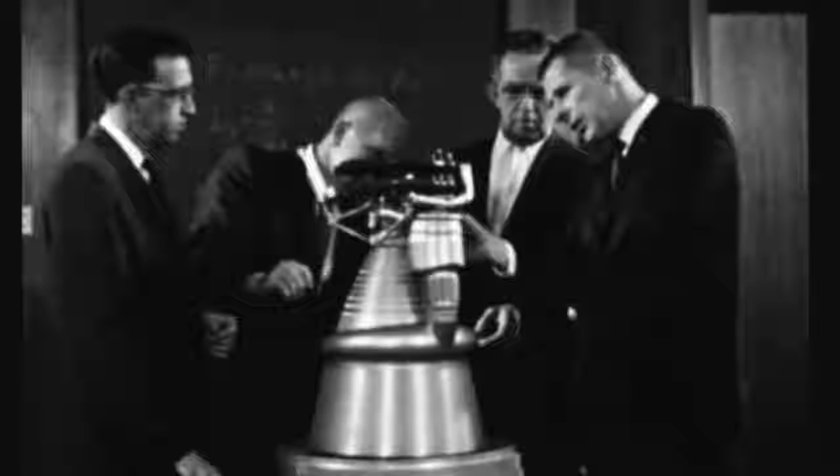Shortly after its establishment in 1958, NASA, the National Aeronautics and Space Administration, began the job of creating rocket power capable of thrusting skyward a spaceship weighing 3,000 tons. How much is 3,000 tons? As much as this nuclear submarine, or 24 jet airliners fully loaded with passengers, cargo, and crews.

But such gargantuan power must also be as humanly reliable as possible, for men will ride the ship to the moon.

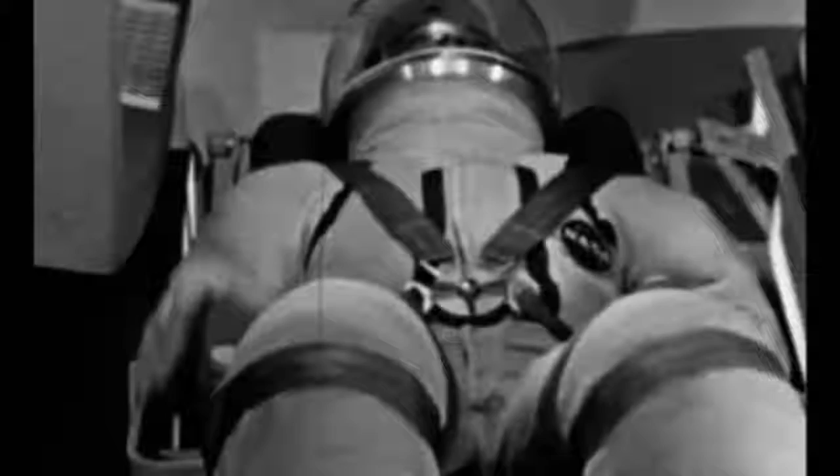Under the technical direction of the Marshall Space Flight Center, the task was assigned to Rocketdyne, a division of North American Aviation Incorporated.

In California's Santa Susana Mountains, where Butterfield stages once rolled down rugged trails, Rocketdyne engineers had created America's largest propulsion field laboratory. On the ashes of campfires built here by the outlaw Joaquin Murrieta, other rocket engines had already begun their trials by fire. Anchored to test stands, engines poured forth their pillars of flame.

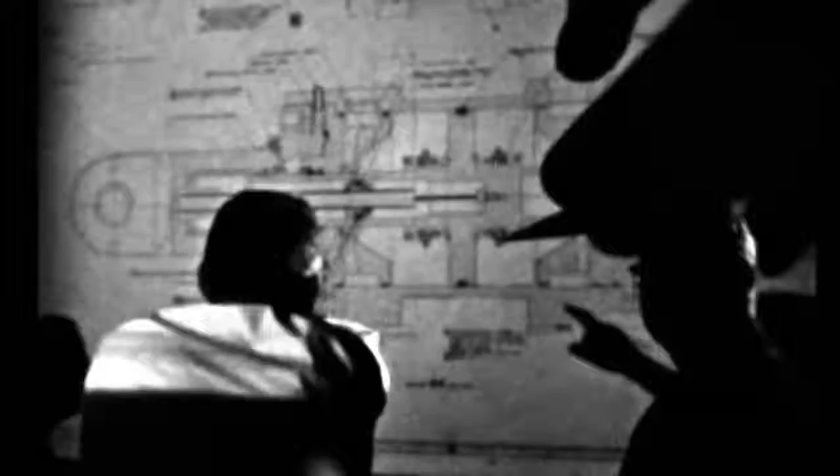Work on the giant engine, christened the F-1, began with studies of other Rocketdyne accomplishments in rocket power. From investigations made for the Air Force as far back as 1955 to space shots of the 60s, experts examined and evaluated results. Information from 20,000 engine and component tests was thoroughly reviewed, analyzed, checked.

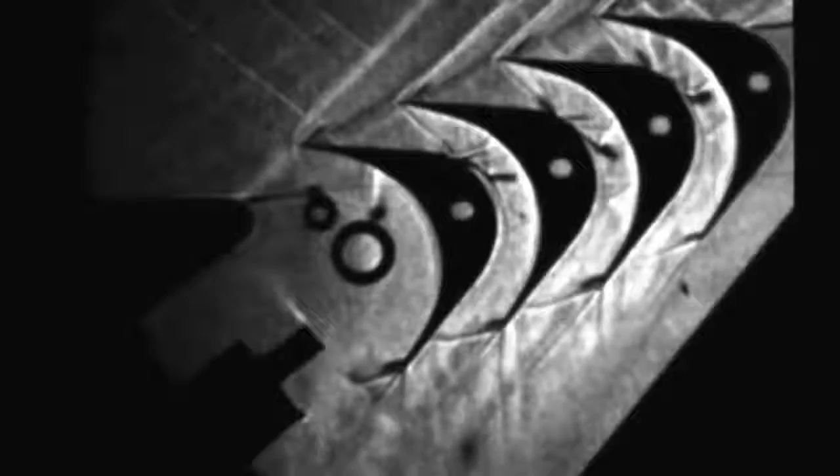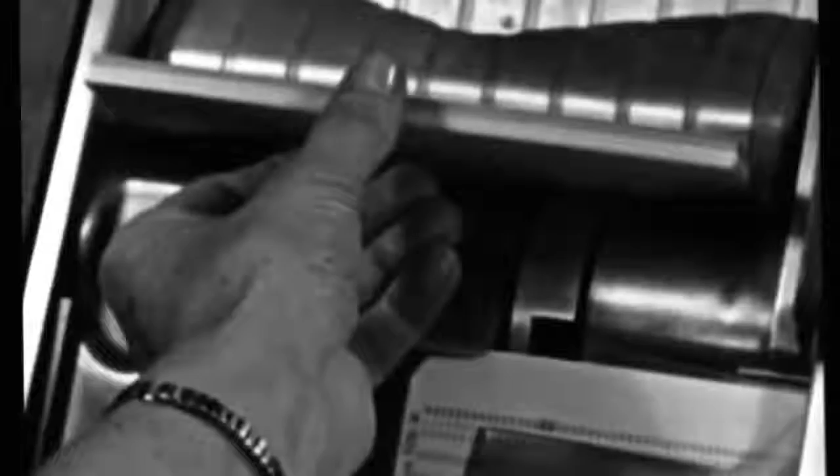To the F-1, the Marshall Space Flight Center had assigned the mammoth task of lifting the mightiest rocket ship ever from launch pad into space. For this reason, NASA had placed the highest priority on the project.

To achieve the tremendous push or thrust needed for this immense engine, data and design were precisely plotted. Steadily, systematically, design developed into a prototype.

Harnessed here within the metal and might of this engine lay the outer space prestige of the United States. This new F-1 must perform perfectly, for more than just time and money are involved. Men's lives will depend on it.

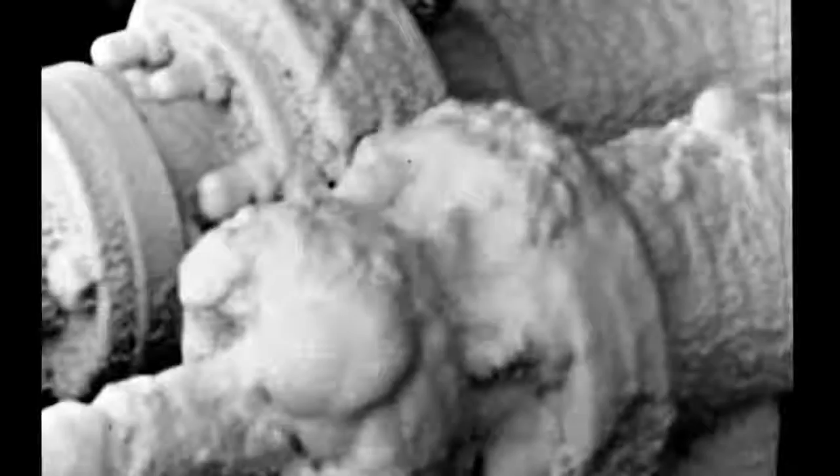Since there is no air in outer space for a rocket engine to breathe, it must carry along its own. Liquid oxygen at 300 degrees below zero. At the same instant this frigid oxygen is flowing, however, an inferno of 5,000 degrees Fahrenheit is created inside the engine.

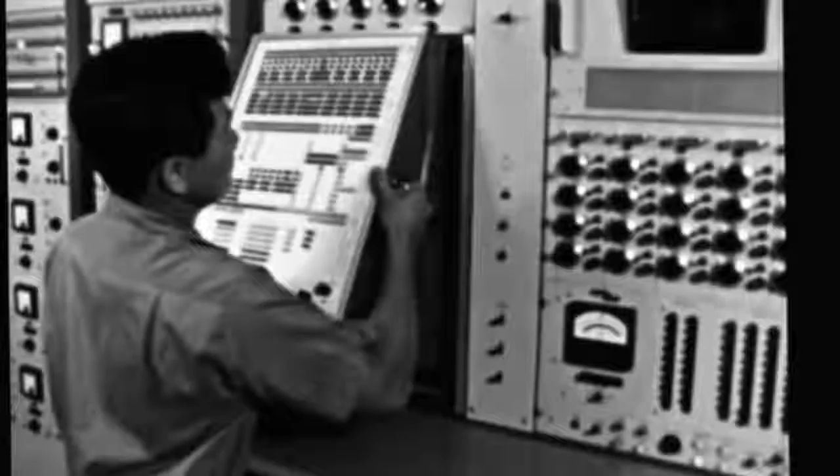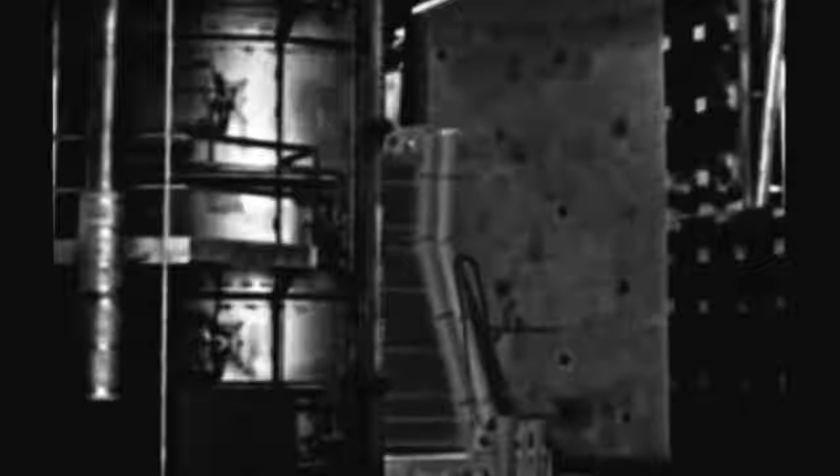A new generation of production techniques and tools had to be devised. New methods of manufacture, new adjustments, new ideas. Advanced metallurgy had to produce superior metals of great strength. The latest instruments and inventions were prepared and put to their purposes.

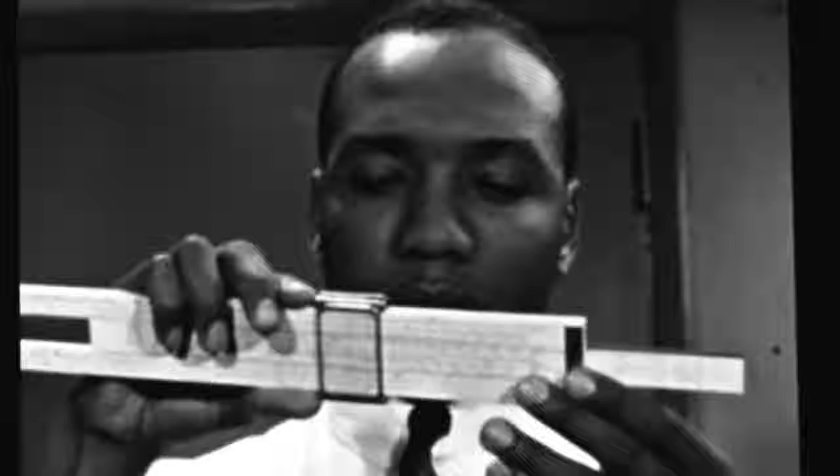Essential details were pictured in black and white. A myriad of matters were pinned down. The best talent and technologies were assembled.

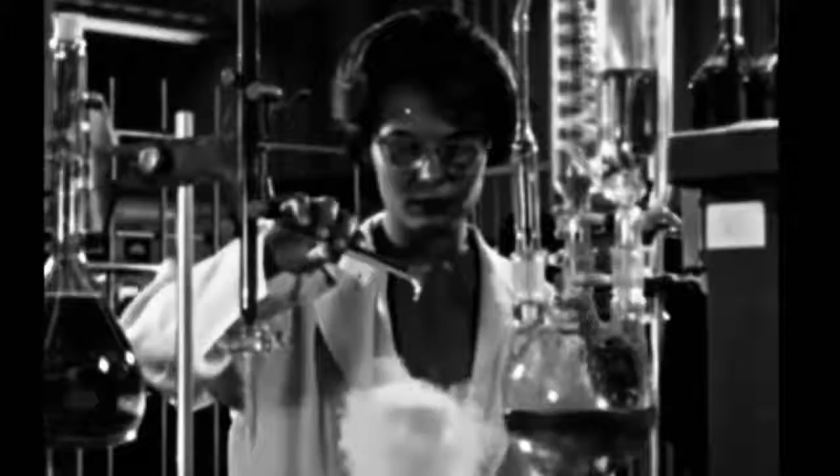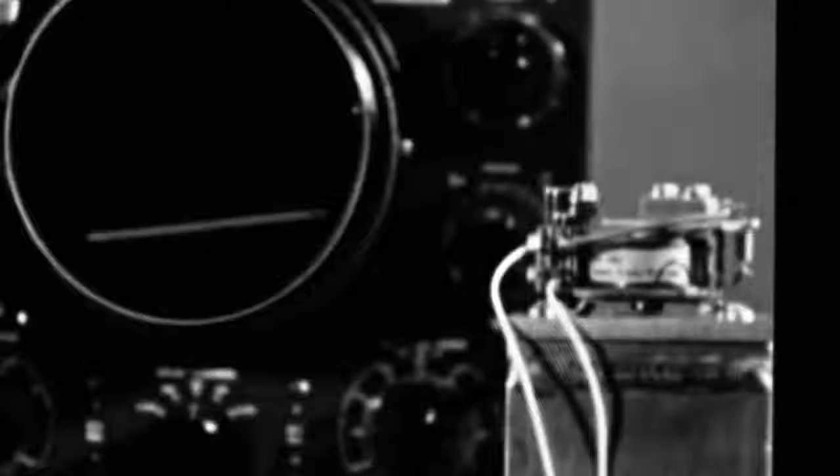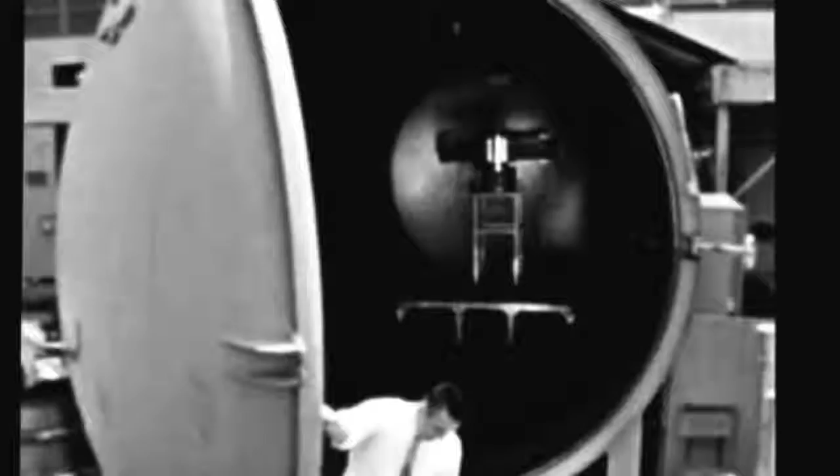Tests were run for withstanding the tremendous acceleration of launch. Intense vibration, prodigious pressures, the vacuum of outer space, extremes of cold and heat.

Yet all of these were merely samplings of the countless complexities to be solved. There was more, much more to fathom.

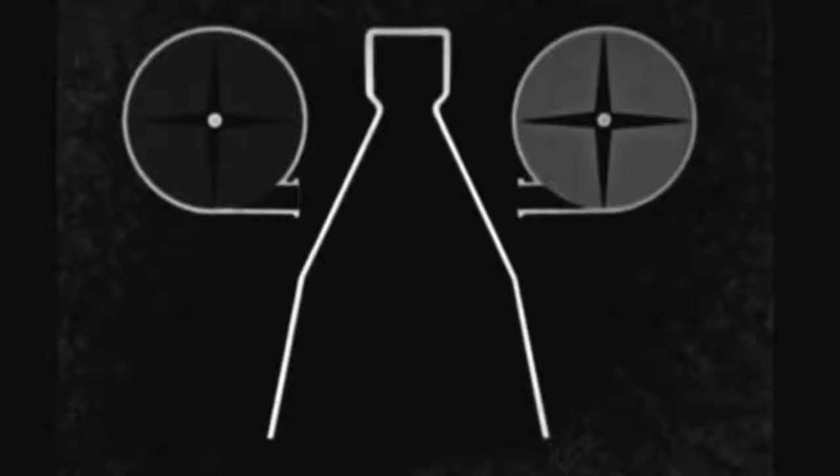To feed the F-1 with liquid oxygen and kerosene, pumps were needed, capable of forcing 3 tons of propellant into the engine in a single second. That's as much fuel as your automobile uses in an entire year. The combined power of these pumps would equal 30 diesel locomotives working together.

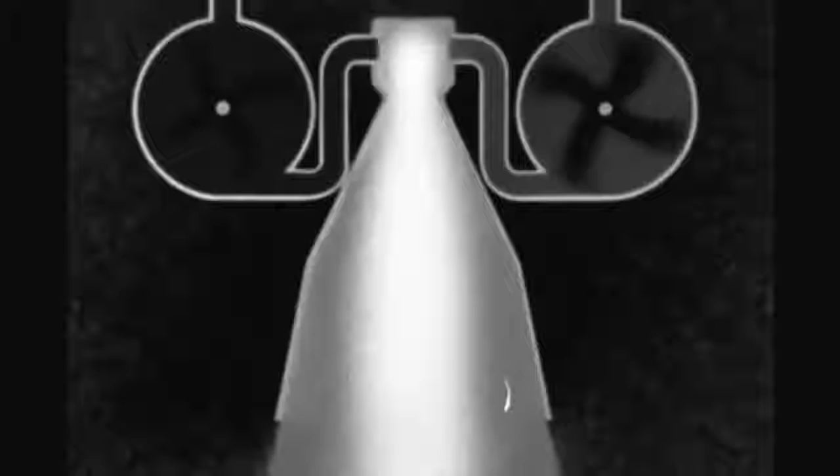There was more for the engineers to ponder. Because weight in a rocket is at a premium, each pump must be confined to a small, compact package.

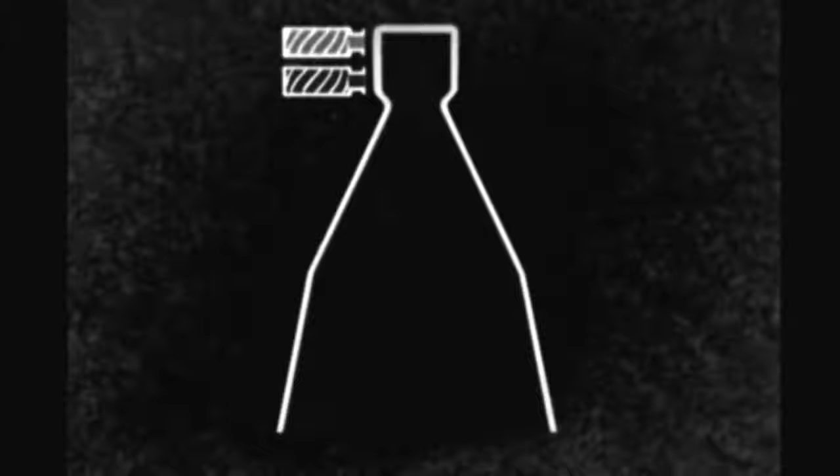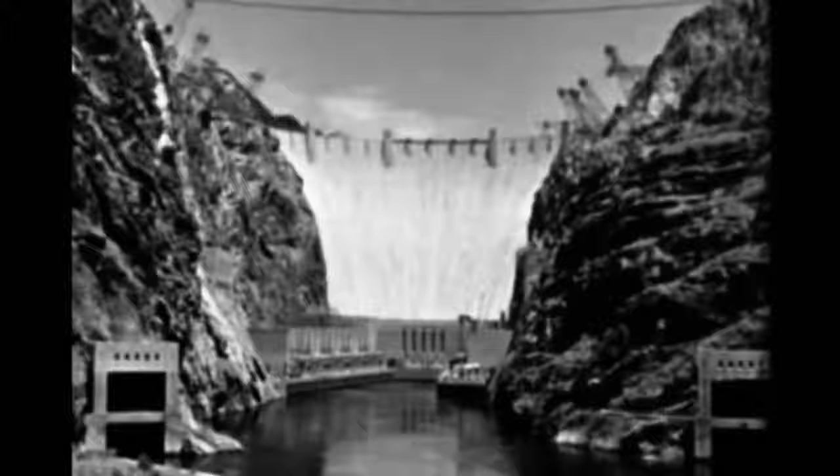Entering the combustion chamber, fuel would have to burn with volcanic force to produce a thrust of 1,500,000 pounds. The equivalent power generated by 17 Hoover dams.

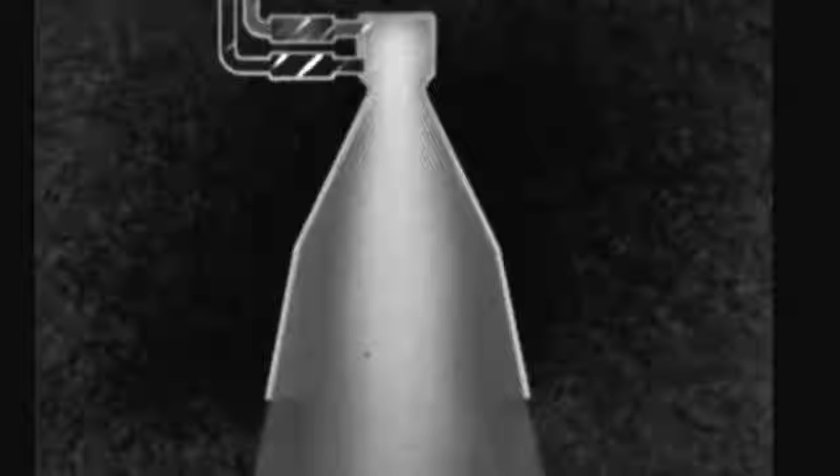Once unleashed, however, this titanic force must still be under absolute control. Thrust precisely delivered. Duration regulated to the fraction of a second. The engine must be instantly stopped when necessary by the push of a single button.

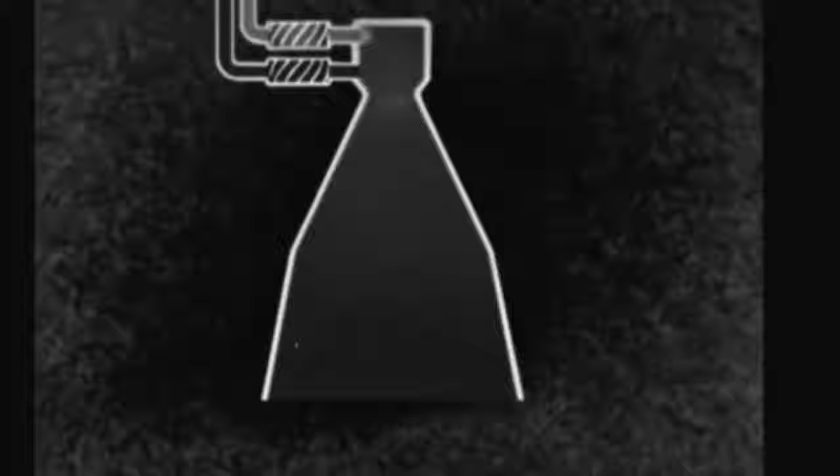To these formidable demands, the Marshall Space Flight Center had added the requisites of reliability, simplicity, and ruggedness to provide the utmost safety for the men who will ride atop the F-1 engines.

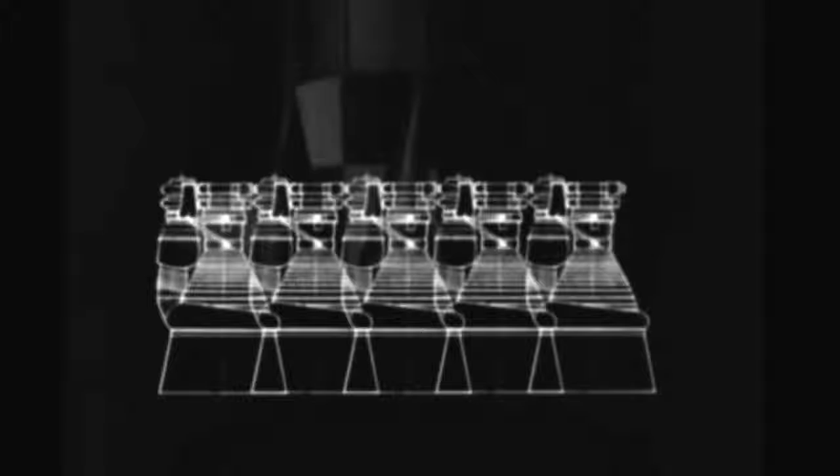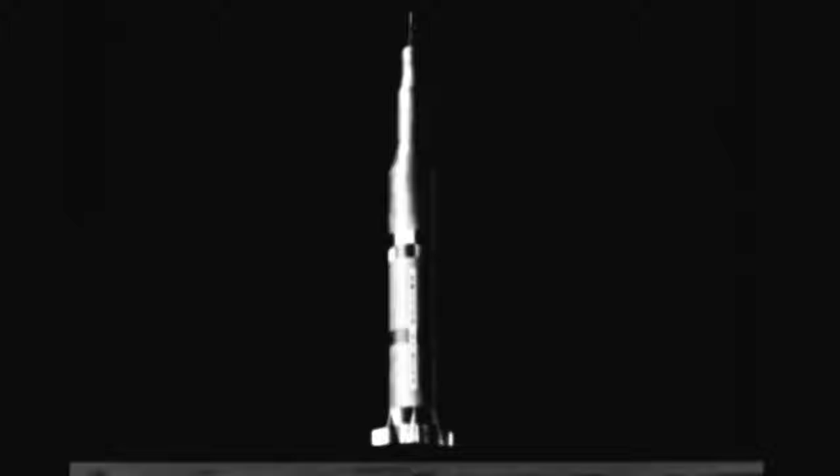And the F-1 must be adaptable to fit such giant spaceships as the advanced Saturn moon rocket now being planned by NASA. This Saturn, the C-5, will carry the Apollo spacecraft and its crew on the first expedition to the moon.

Riding with the astronauts will be food, water, oxygen, power, air conditioning, communications equipment, scientific instruments, and a means for return home. Heavy shielding will protect them from deadly radiation. In addition, thousands of gallons of fuel will be contained within these tanks.

Such a tremendous amassment of weight will call for the advanced Saturn to be 350 feet high, tall as a 30-story building. It will weigh 3,000 tons, 6 million pounds of takeoff weight, the heaviest load ever to lift off the Earth by its own bootstraps.

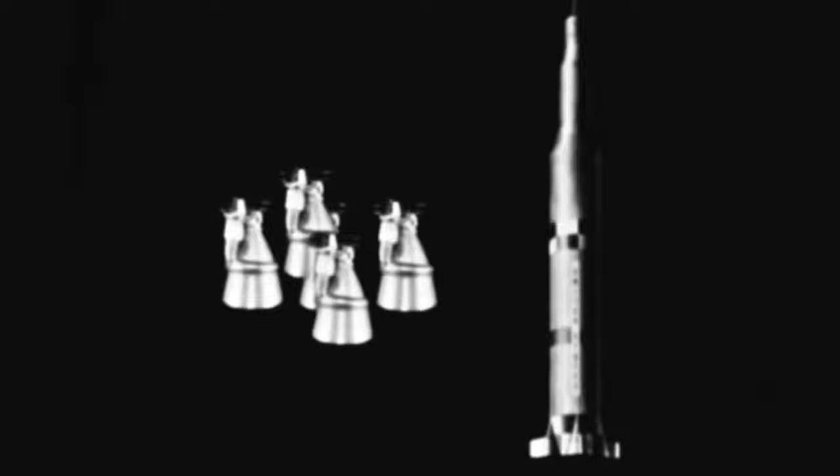How will such a stupendous task be performed? By clustering 5 F-1 engines together for the Saturn's first stage, creating 7.5 million pounds of thrust. Power equal to 85 Hoover dams.

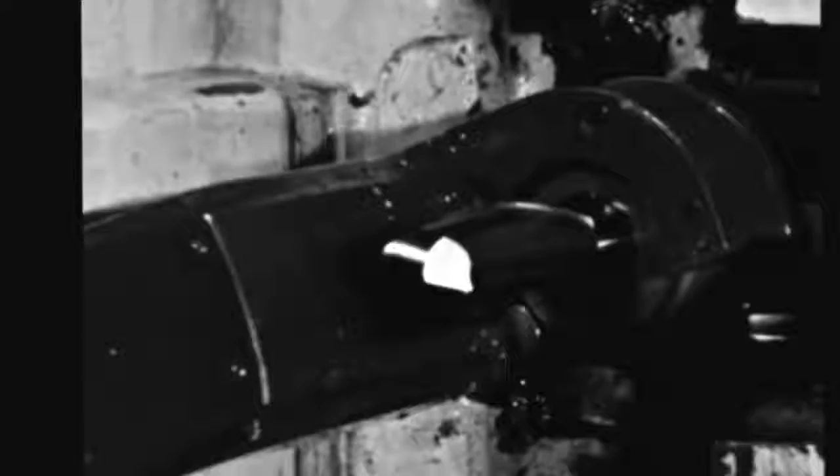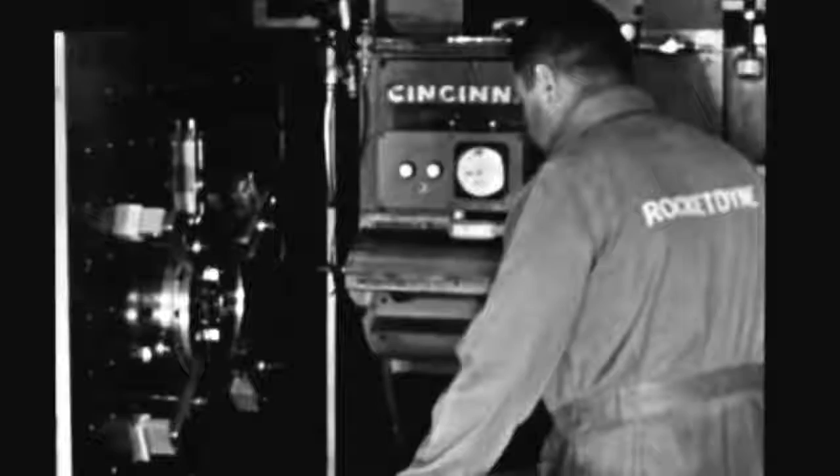The intricacies of such a dynamic endeavor demand machines able to effect economies in money, minutes, and material. And shape high-strength metal to exacting requirements. And also, men. Skilled men to manipulate the machines.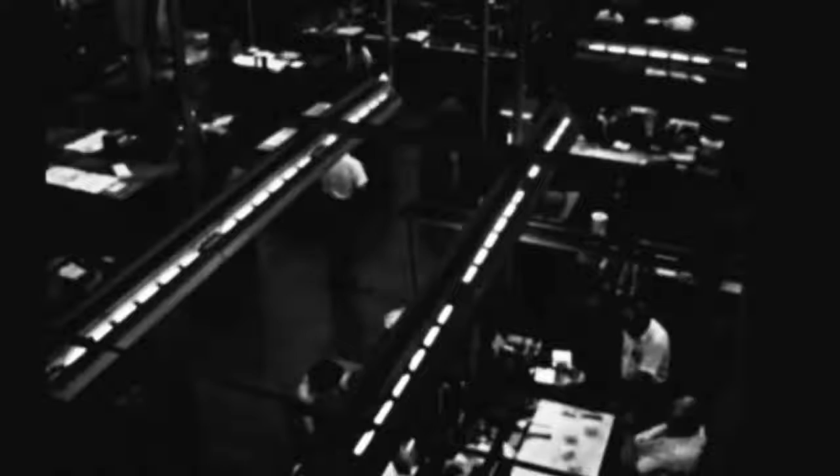And men with trained minds to probe deeply into problems never known before. Hundreds of scientists and engineers, and more hundreds in manufacturing and administration, all directing their efforts and energies toward bringing into reality the F-1.

From the mastery of 1,000 things never thought of before, from a multitude of materials newly discovered, invented, or adapted, from thought to tangible reality, the F-1 is no longer a drawing board dream. It exists now.

The F-1 is a mighty metal fact, the result of 4 earnest years of work by the nation's most experienced rocket engine experts. In May 1962, the F-1 was successfully run at full thrust for full duration.

Captive runs continue at the NASA High Thrust Test Area at Edwards, California. They will continue night and day, perfecting the F-1 for flight into a new dimension.

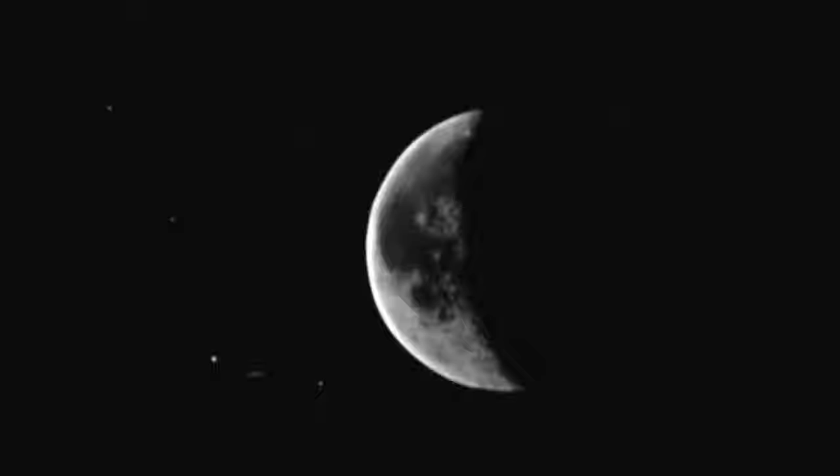With the F-1 engine, we will be ready to send our men to the moon and beyond. There is no end to space, and the moon is not our final target. Long before that landing has taken place, routes will have been plotted for expeditions far beyond it.

As long as man seeks after knowledge and wisdom, there will be no ultimate goal. There will only be a series of steps, each reaching out a little farther into the vast realm of the unknown.